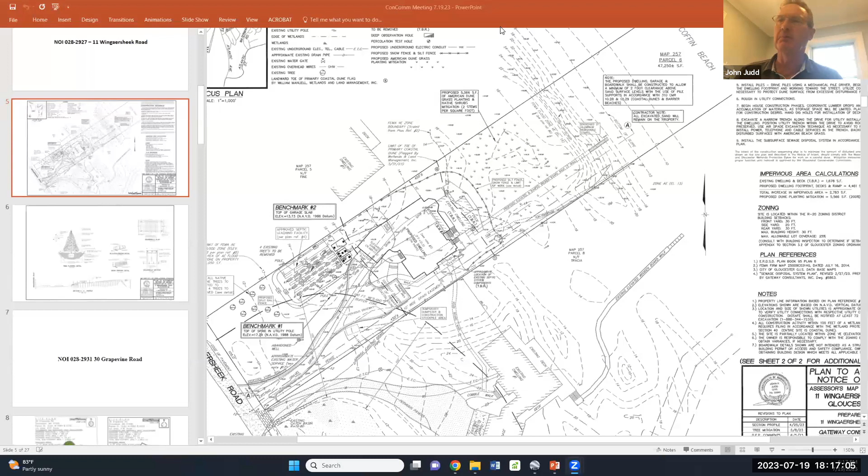So quite a bit of modifications have taken place over the last couple of months, and I think I've covered everything. I know there may be some more questions, but we'd be happy to answer any. I believe Bill might be in attendance if there's any questions on the coastal dune. Thank you, Mr. Judd. First up, then I'll open up for public comment.

Anybody in the public who wishes to speak for or against the project at 11 Wingaersheek Road may do so by hitting the raise your hand button at the bottom of your screen or hitting star-9 on your phone or handheld device. We currently have 13 attendees present, and I'm not seeing any hands up at this time. Hearing none, close the public comment period.

Next up would be Commissioner roll call comments. Member Charpentier, no comments. Member Gradwell, no comment. Member Sargent: thank you for the meaningful revisions. I'd like a 2-year monitoring for the mortality mitigation plantings.

Member Viteri, I'm abstaining. Member Villa, I too want to thank them for the meaningful changes in the project. It's come a long way.

Thank you, and Member Jackson. I also would like to thank them for the changes, and to thank you for doing that last site visit. It was appreciated, Chuck.

I would like to hear from you. I know you had concern about the lines, the flood lines, the primary frontal dune lines, and the explanations for meeting the performance standards. Where are you on those subjects at this point?

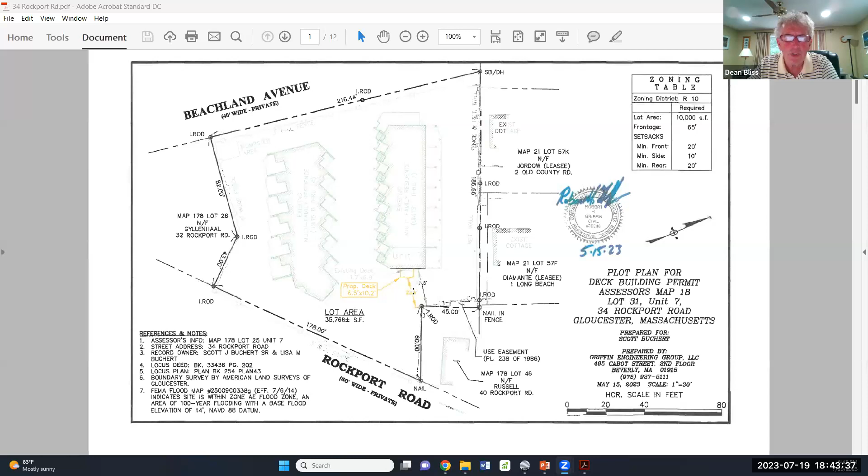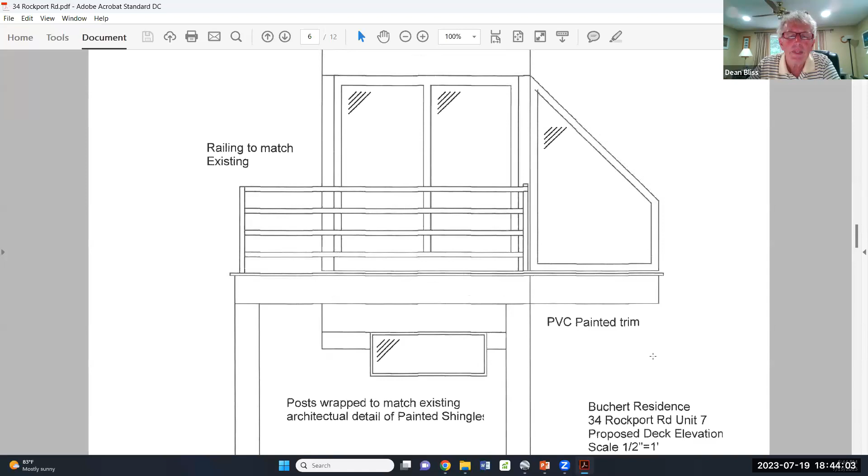There you go, thank you for your photo. So we really need to have 2 posts underneath it, and I propose to do it in such a way that it matches the existing architecture.

Next up would be to open up for public comment. If anybody wishes to speak for or against the project at 34 Rockport Road, Unit 7, you may do so by hitting the raise your hand button at the bottom of your screen, or hitting star 9 on your phone or handheld device.

We currently have 8 attendees and there are no hands up at this time. Seeing none, hearing none, I close the public comment period.

Next up will be commissioner roll call comments. Member Charpentier, no comments. Member Cook, just want to confirm that the new deck will be pervious, that's all. Member Gradwell, no comment. Member Sargent, my question was the same as Mr. Cook's.

Member Viteri: I noticed in the approval letter from the homeowners association that there's a comment that if the applicant can consult with the contractor or structural engineer to determine the feasibility of cantilevering the deck rather than using support pillars. Has that inquiry been made, and if so, what was the result? Was there a determination made about cantilevering?

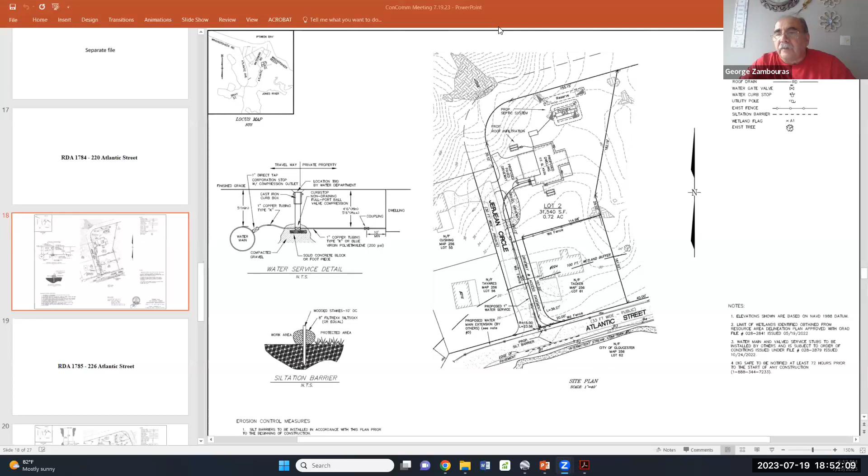We'll install silt socks near our excavation and on the southerly side of Atlantic at the edge of the pavement. The work probably will take all of 1 day, if that - half a day to excavate the trench and another half day to restore the area. It's partly pavement and partly a gravel stone roadway of Jelean Circle.

First up is to open the public comment. Anybody in the public who wishes to speak against the project at 220 Atlantic Street may do so by hitting the raise your hand button on your screen or hitting star 9 on your phone or handheld device. We currently have 7 attendees present and there are no hands up. Seeing none, hearing none, close public comment period.

Go to Commissioner roll call. Member Charpentier, no comments, very straightforward. Member Cook, no comment. Member Gradwell, no comment. Member Sargent, yes, any dewatering that needs to take place should be adequately treated before being discharged.

We don't anticipate any. There's been other excavations in the area. We have plenty of test pits from the proposed septic systems on site. All the test pits were a minimum of 8 feet deep. There was no water encountered in any of them. But in case we do, we'd like it treated - we will bring in a silt bag and run the discharge through the silt bag.

Member Viteri: it looks like it on the plan, but can you confirm that the work area is entirely within the right of way or the roadway footprint? Yes, it is. If you look at the plan where it says driveway and access easement, that's actually a sliver of 220 Atlantic, which runs down the edge of Jelean Circle into Atlantic. That's part of the lot. We're just outside that, into Jelean Circle.

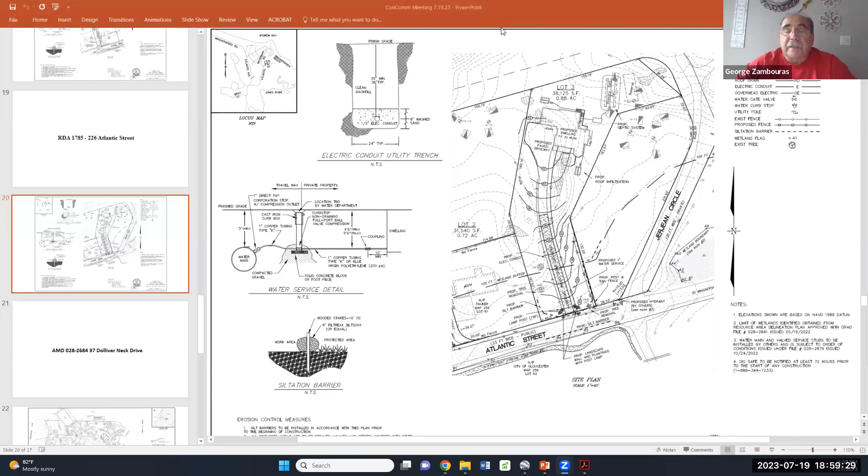I'll open it up for questions or comment. Does anybody in the public wish to speak for or against 226 Atlantic Street? You may do so by hitting the raise your hand button at the bottom of your screen or hitting *9 on your phone or handheld device. We currently have 6 attendees and there are currently no hands up. Hearing none, I'll close the public comment period.

We'll move on to roll call comments from commissioners. Member Charpentier, I have no comments. Member Cook, no comments. Member Gradwell, no comment.

Member Sargent: Yes, I want to make sure that the trees are native variety, and again, all dewatering must be adequately treated before being discharged. And I would like a 2-year monitoring for the mortality of the mitigation plantings.

That is fine. Member Viteri: Yeah. First, I think the mitigation trees should be shown on the plan. It doesn't look like they are now. I also have an issue.

I have a concern about the silt barrier on the southern side of Atlantic Street, across the street. It looks like the contours and the slope goes a little bit towards the southeast, I believe. I'm wondering if any stormwater might carry sediment beyond the extent of the silt barrier as shown on the plan, particularly towards wetland flag B6. I'm wondering if it makes sense to wrap the silt barrier around flag B6 and follow the contour of the intermittent stream, just to make sure flowing water that follows the slope down doesn't go around the silt barrier as shown on the plan.

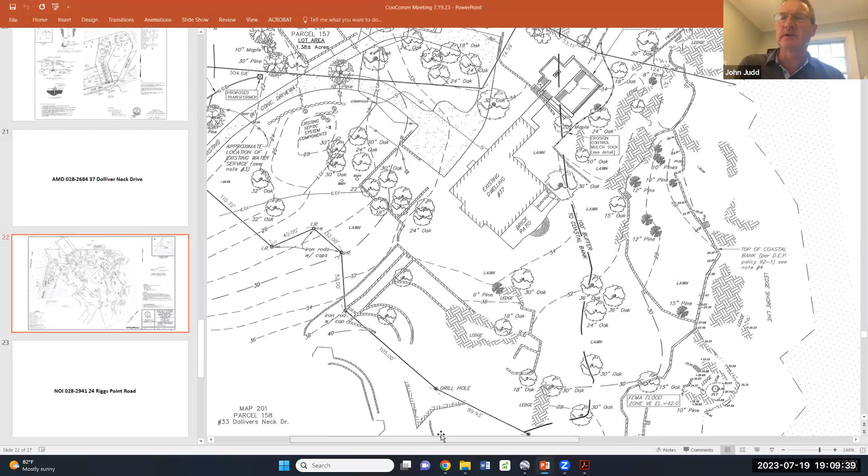Essentially, as Chuck has pointed out with the cursor, it's going to be coming along that proposed route. The work is in the buffer zone to the marsh and the coastal bank as shown. There are quite a few oaks there that we're trying to avoid. We've gone out there a few times, staked it out, and the arborist is confident that they can excavate this and properly trim the roots and install the conduits needed without permanently damaging those trees as shown.

So you can see this curved route to it, and we've located all the oaks there. The intent of the owner is to maintain those and make sure they survive and thrive in the future, while at the same time giving themselves adequate electricity. So that is the proposal, to amend what was previously approved up the driveway to show this route, because that is the route National Grid has selected. I can answer any questions you might have.

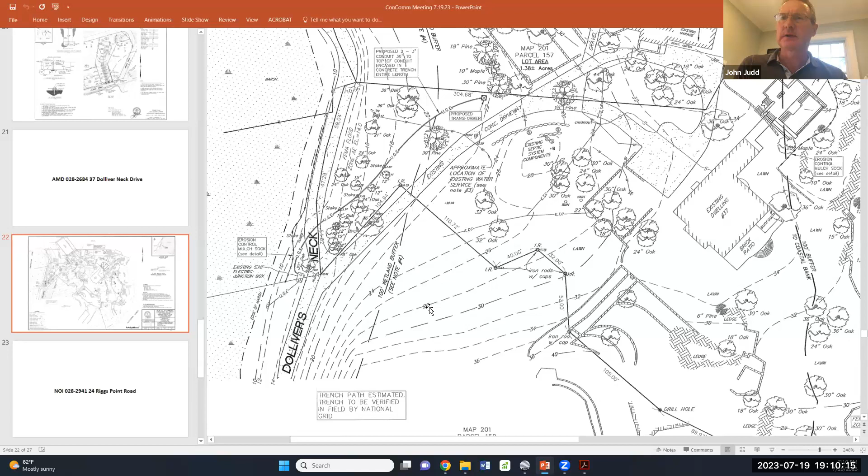Okay, first I'll open up for public comment. Anybody in the public who wishes to speak for or against the amendment at 37 Dolliver Neck Drive may do so by hitting the raise your hand button at the bottom of your screen or hitting star 9 on your phone or handheld device. We currently have 4 attendees and there are no hands up. Seeing none, hearing none, close public comment period.

Next up would be commissioner roll call comment. Member Charpentier, no comment. Member Cook, no comments. Member Gradwell... Member Gradwell, you're muted. He is muted. But I did hear him say no comment. Oh, I didn't see him say. No comment. There it is. Member Sargent.

Yes, you said the tree roots are going to be trimmed, and I'm hoping that they're not impacted, but these are mature trees. I think it may be beneficial to have an arborist monitor these trees for 2 years to make sure there's no adverse impact from the pruning of the roots.

Member Terry, no comment. Member Gullah, no comments. And Member Jackson, no comment, no further comment.

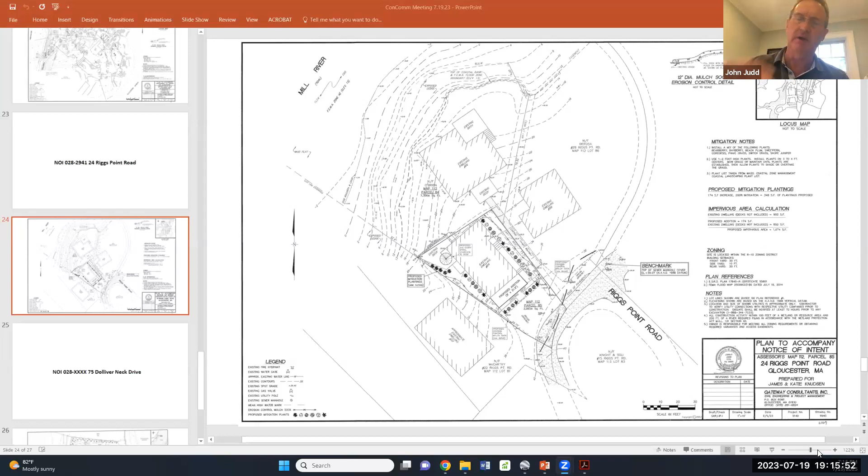Thank you for the last time tonight. John Judd, engineer with Gateway Consultants, representing the Knudsens for this property at 24 Riggs Point. We're proposing an 8-foot by 21.8-foot addition along the front of the house. There's an existing deck, a portion of which would be covered by this proposed addition. Where the cursor is, a proposed second floor spiral staircase would be a pervious opening, covering an existing deck, but that's on the second floor.

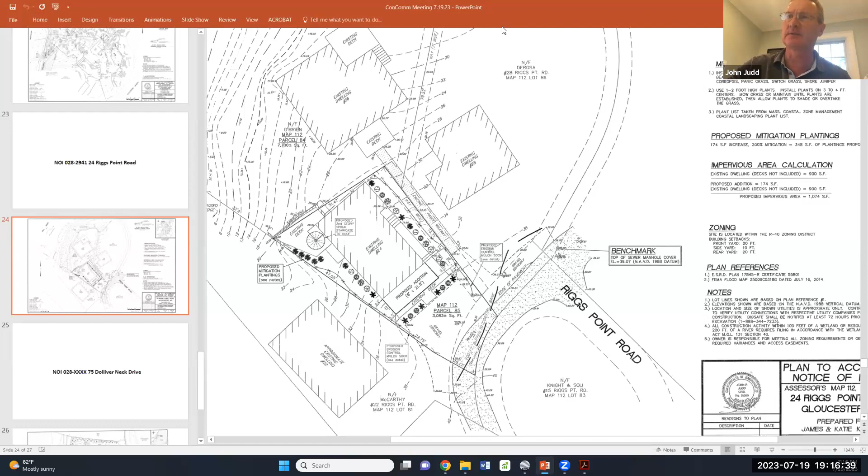The proposed addition is toward the road side of the house, which would be proposed impervious area over an existing deck. We include calculations showing 200% mitigation plantings proposed, native salt tolerant mitigation plantings, to offset that proposed impervious area associated with the addition. We also have erosion control and so forth around the project. We can answer any questions. I believe Jamie's on the line if there are specific questions I cannot answer, but that's the project as proposed.

Okay, first up would be the public comment period. Anybody in the public who wishes to speak for or against the project at 24 Riggs Point Road may do so by hitting the raise your hand button at the bottom of your screen or hit star 9 on your phone or handheld device. We currently have 3 attendees and there are no hands up. Seeing none, hearing none, close public comment period.

Next up would be commissioner roll call comments. Member Charpentier?

Just one question about the increase in impervious. Did you say that part of that deck is going to be covered? Yes. So the deck extends much further out toward the street, and a portion of the existing deck would be covered by the proposed addition. I just wanted to know what the increase in impervious was and the mitigation in accordance with that. So the proposed addition is 8 by 21, which would equate to 174 square feet, and we're proposing mitigation at 200% of that, 348 square feet.

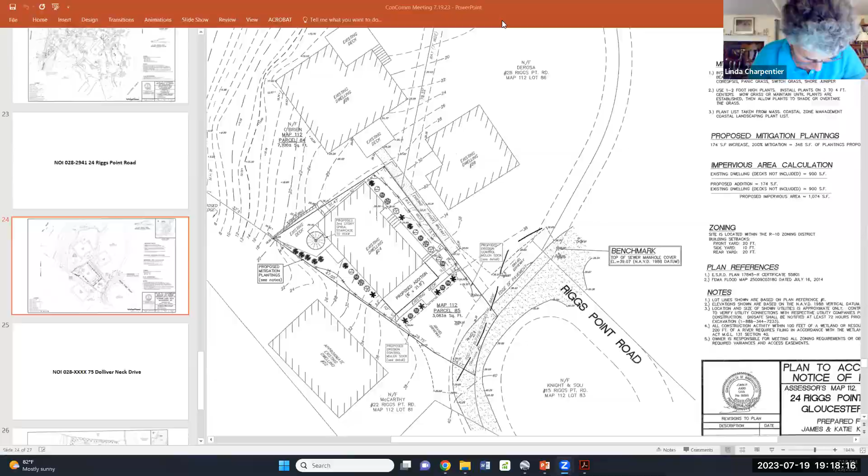Member Cook: it's really the sequence, I guess - is the addition going to be built over the existing deck, or is the existing deck going to be removed and new footings put in? That's the question I have. The existing deck would be removed and this would be a spread footing. What kind of footing? Spread footing, standard spread footing. Okay.

Member Gredwell: no comment. Member Sargent: Yeah, I believe this is riverfront and I didn't see an alternative analysis, and I would like a 2-year monitoring for the mortality of mitigation plantings. Terry, no further comments.

Member Gullo: nothing else to add. Member Jackson: I'm assuming that this is redevelopment. Okay, so we don't need an alternatives analysis, but do we need to consider whether this pushes it over a 10% of the lot expansion? I'm still not clear on this riverfront stuff.

Well, Chuck? That'd be for new development, or it's already going to be exceeding, but they are mitigating 2-to-1 for the expansion. So we don't have to do the alternatives analysis, right? Right, we don't have to do the alternatives, but the mitigation negates anything else we have to deal with. Correct. Okay, all right.

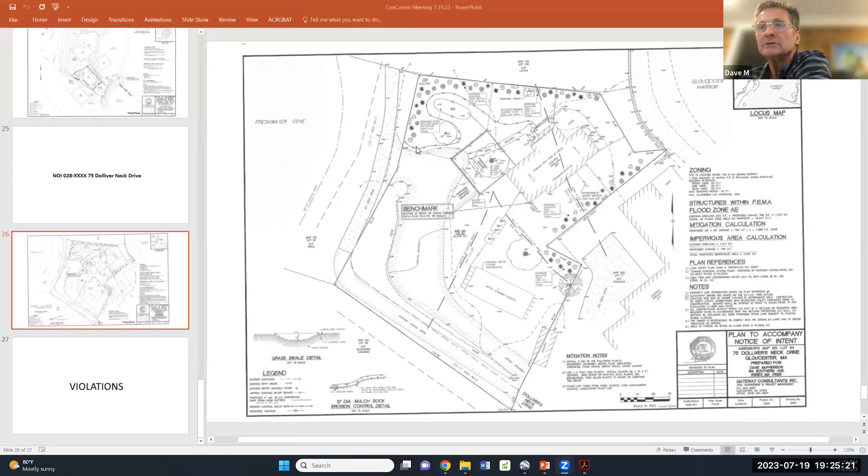Okay, first up I'll open up for public comment. Anybody in the public who wishes to speak for or against the project at 75 Dolliver's Neck Drive may do so by hitting the raise your hand button at the bottom of your screen or hitting star 9 on your phone or handheld device. We currently have one attendee and their hand is not up. Okay, good, seeing none, hearing none, I'll close the public comment period.

We'll move into roll call comments from commissioners. Member Charpentier, no comments. Member Cook, no comments. Member Gredwell, no comment on this one. Member Sargent: because the property is served by an on-site septic system, the garage must not become a habitable space without the health department issuing a formal approval. And I'd like a 2-year monitoring for the mortality of mitigation plantings.

Member Materi: No comments. Member Gullah: It looks like we're losing one large tree right in the middle of the garage, correct? That tree had a drought about 3 or 4 years ago that did a number on it. I've been renting this with VRBO, and multiple tenants told me, and I know because I'm the one who picks it up, that tree was dead. I had to do an emergency haircut on it, losing most of the limbs because it was right where everyone would park and walk into the house. People were scared to even go near it or park under it. So that tree is pretty much dead.